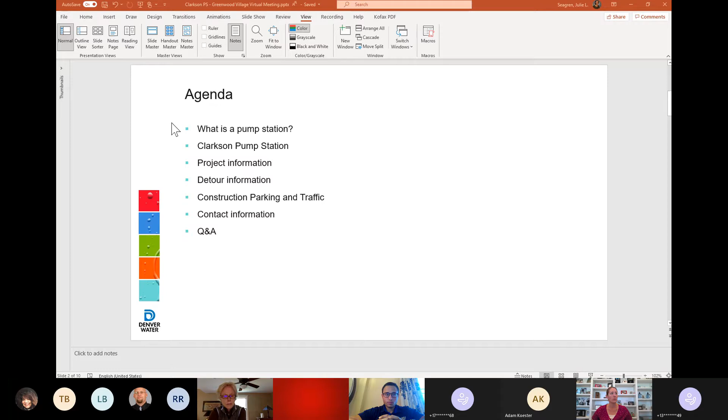And so this is used to either take down pressures or even boost pressures up, depending on what our system needs. So the pressure in this area is actually quite high, and this pump station allows us to lower the pressure in the area. And that's one of the reasons why this project is taking place, because a number of the pumps that are currently in this vault or pump station are actually no longer operating. So we're needing to replace them.

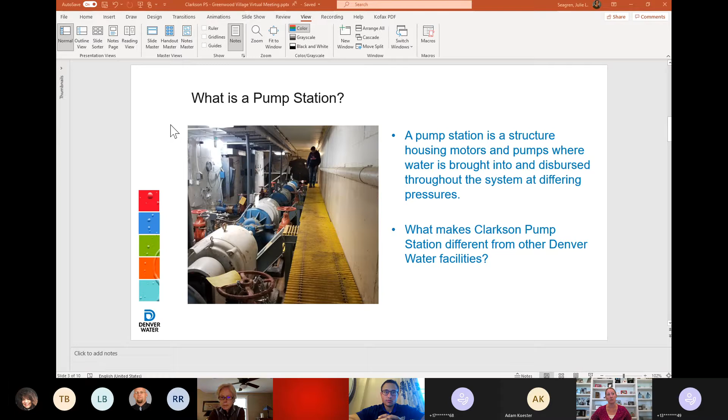So what makes Clarkson Pump Station a little different is normally a pump station is a vertical structure. We have them throughout Denver Water's system. We have them in structures that look like homes. We have just normal structures. But the unique thing here is that it's an underground vault for Clarkson Pump Station. So if you're driving past it, you may not even know that it's there. You'll see the bollards above ground. But the picture here on the left gives you an idea of what this structure looks like underground.

So it currently has 6 motors, again, not all of them are operating, and 6 pumps. And so what we're doing is utilizing the existing structure, which was actually not built by Denver Water. We inherited it when we took over the Southeast Englewood Water District in 1964. Southeast Englewood actually built this original structure in 1957, so before Denver Water took it over.

Again, it has existing 6 pumps and motors, as well as a surge tank. One of the questions that we get all the time, or at least specific to this project, is why can't you relocate it? It's in a residential area, it's inconvenient. But we evaluated that situation early on in design, and we realized that it was just cost prohibitive.

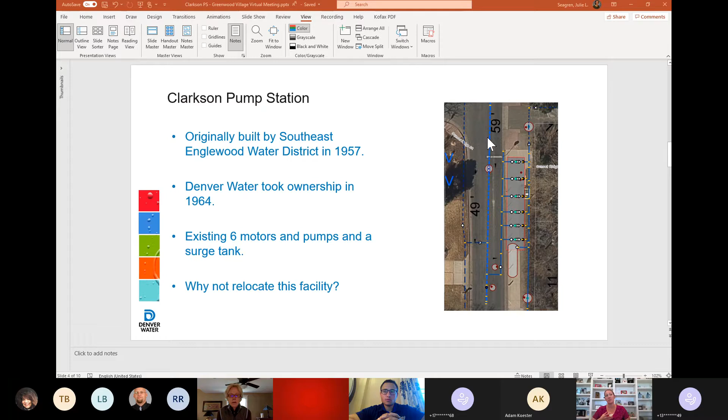As you can see in this picture here, we had the large conduit going down the road. There's a lot of infrastructure in the area that would require relocation. It would cost a significant amount of money, millions of dollars that, quite frankly, we're not able to spend on relocating this particular infrastructure piece of Denver Water system.

So basically, project information is Moltz Construction won the bid. So what they're going to be doing is they're going to be excavating around the existing structure. We're going to be reusing that structure. We're going to be removing the roof, completely gutting the inside minus the surge tank, and then replacing it with 3 new motors and 3 new pumps.

So that original picture that you saw is going to be completely gutted. It's going to get new HVAC, new electrical. It's going to be a whole new guts inside the structure there that will allow for us to continue to operate this piece of our infrastructure in the most efficient way possible.

So there are no water outages planned. I know that was a question that we received earlier in the week. Because of the way that vault and pump station is oriented and the way that we have valves already within our system, we don't plan on having any water outages. Of course, there's always some type of emergency that may cause one, but we don't have any planned right now.

Schedule, right now we're looking at mobilizing towards the end of the week of October 4th into that following week. Because of the way that Denver Water does a lot of infrastructure, a lot of our construction happens in the wintertime because it's non-load season. So that allows us to take down our larger conduits and do maintenance on our system. And this is an example of that. We could never do this project during the summer or spring because of the needs of your irrigation and everything else.

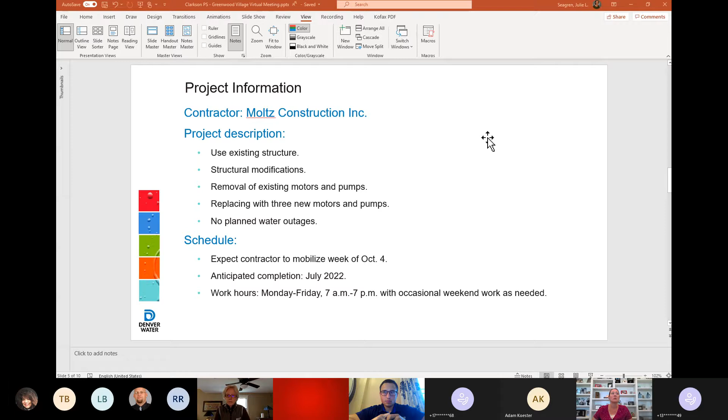Work hours per the permit for Moltz will be 7 a.m. to 7 p.m. Monday through Friday. Right now, there's no weekend work currently scheduled, but there might be an occasional requirement for a Saturday, just so you're aware of that. We're going to go through what the actual impact to your traffic is in just a moment. But that intersection at Clarkson and South Sherman is going to be closed to through traffic. So it's important for you to understand the impacts to the area.

Local traffic, we're really trying to divert it, utilizing Belleview, East Littleton Boulevard, as well as Broadway. So some may be happy about that, less traffic on Clarkson Street, but we are going to be having that intersection closed for through traffic. Flaggers will be stationed on either side of the excavation. And again, really trying to utilize other roads besides the Clarkson and Sherman intersection.

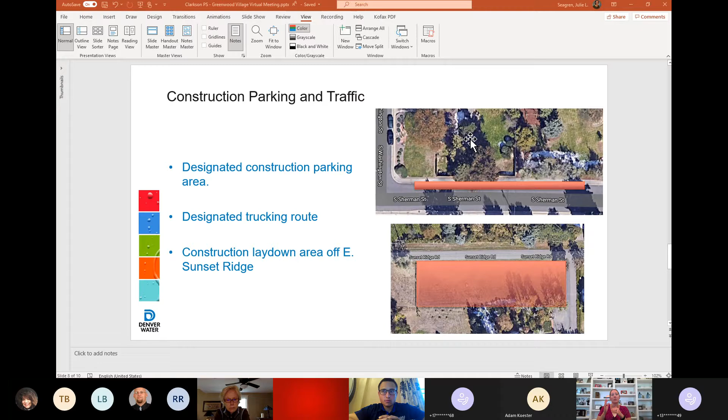And then there's also a designated truck route. We wanted to make sure everyone was aware of this. So we're actually going to be using South Sherman. And then what the trucks will be doing is making a turn in that intersection there of Clarkson and Sherman and then heading back out Sherman. So you're not going to see the construction traffic going up and down Clarkson Street. They're going to be utilizing Sherman.

So I know that's a lot of information, but I just wanted to open this up for any questions that anyone may have. For those of us on the phone, can you give us your phone number? Sure. The Denver Water phone number is 303-839-2444. Okay. Hey, Julie, the number that you gave out does not match the number on the slide. Can you confirm? 893-2444. So sorry, I switched the 3 and the 9. So 303-893-2444. And that's also on the denverwater.org website.

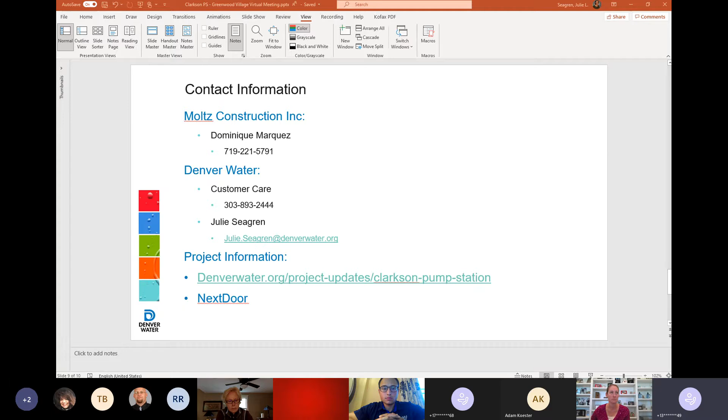I live on South Washington Street between Belleview and South Logan. And the kids use it as a speedway going to school. So I don't know if the plan is to have more cars coming down South Washington Street with this detour, because they really can't get there from here. But will you be putting signs up around the neighborhood? We'll be indicating detour signs, yes, advising folks instead of using Clarkson or Washington to utilize Broadway to head north and south. Okay. Understanding it's a little out of the way, but that's probably the safest because obviously we don't want to divert that type of traffic onto Washington. Right. Thank you.

I have a question as well. From the map that was mailed out, it reads that the road is closed right past the field on Littleton Boulevard. It says the road is closed to through traffic. That's going to be just the signage, letting them know that actually at the intersection of South Clarkson. So this is the same map that was sent out on the notice itself. And so what you're seeing is where the signage is going to be located, so that way folks don't get all the way to the intersection and realize that it's closed. It allows them to divert before actually getting there. Okay, so I live on West Glow Lane, which is the first turn once you turn up on Clarkson. Yeah, right there. So if I come down Littleton, I can get to my home.

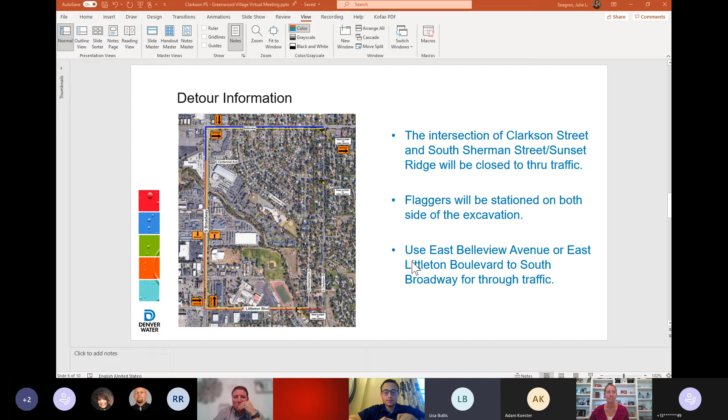Hi, my name is Lisa, and I'm one of the 3 houses on Sunset Ridge Road. We have a really busy household. We're in and out a lot. I've got 3 little kids, a puppy, and a job. So I see that there is not supposed to be any parking on Sunset Ridge. Is that correct? That is correct. Okay, so you'll just be storing things on Liz's field, hopefully not encroaching on our driveway.

Correct. And are we going to be able to access our house easily? Yes, we'll have flaggers located right at that intersection to allow traffic to go in and out of there. So you will be able to access from Sherman, either going directly east or coming south on Clarkson, turning onto Sunset Ridge. Okay, so that piece of Clarkson will be accessible to us? Yes, you will obviously have a flagger there directing traffic, but yes, you will have access to that.

Okay, and just to confirm, there should not be anyone parking on Sunset Ridge? That is correct, Thomas and Dominique, can you confirm that? But that's my understanding. Yeah, no, we won't have any construction traffic parked on Sunset Ridge. There may be occasions when we're tramming materials from that staging area over to the work site. So there will be a little bit of traffic there with a forklift or a piece of machinery, but otherwise, no, there won't be anybody blocking the road or parked halfway off the side of the road or anything like that.

Okay. And if you're going to need to have the road closed or impassable for a period of time, is it possible that you could let us know? We'll have someone come to your door and let you know, or actually, if you wouldn't mind sharing your contact information with me, I can give you my email address again. I'll ensure that you as well as those neighbors that are impacted are given notice. That would be really appreciated. Thank you.

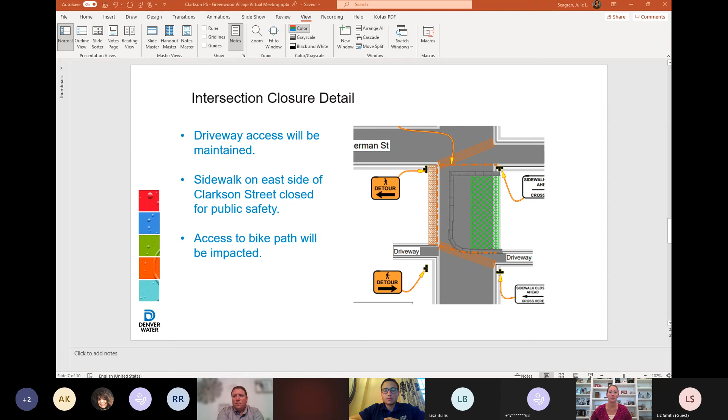Will water pressure be affected? During the project, no. Not that we've been made aware of, because there is such high pressure in the area anyways. But no, water pressure should not be impacted. Thank you. I'll stop sharing my screen. So any other questions for either myself or Moltz?

Just real quick, we shouldn't see any brown water coming out of the tap or smells or anything? No, you shouldn't. If there happens to be any, please contact Denver Water immediately. It might be caused just by the disturbance of the construction in the area, but we don't anticipate having any of those types of issues. Okay, and that's the 893-2444 number? Yes. Okay, thank you. Great question.